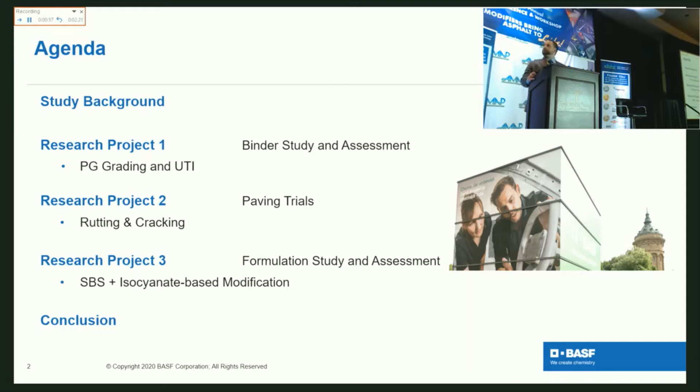Well, that didn't show up. There should be a map on there.

What I wanted to introduce here to everybody is, as most of you know, BASF is huge. It's about 140,000 employees worldwide. What most of us here are used to is the people out of Charlotte. Those guys deal with your latex that you put in your emulsions.

The group that is actually leading this project and this initiative is out of Wyandotte, Michigan. And with that move that I commented on earlier, I actually moved out and we built an asphalt lab and are starting to do research in that area as well out of that facility. So they're all over the U.S. You can see that we have the different states and everything listed, even though the picture didn't show up there.

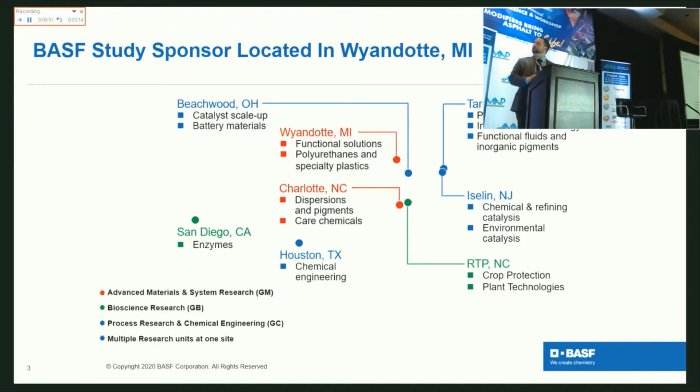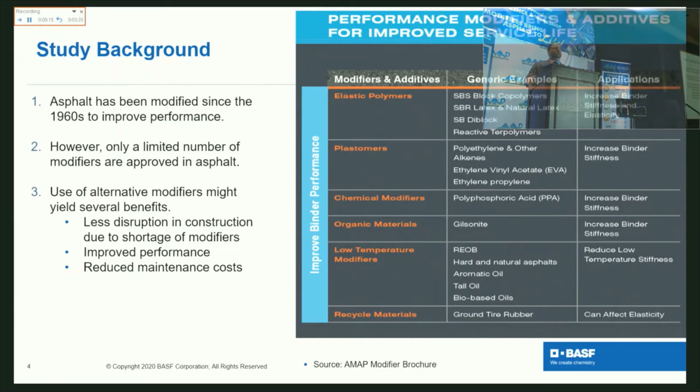So with that background, what we did is we were trying to take this isocyanate, which is essentially a precursor to a polyurethane type chemistry. It's used as a building block for all kinds of stuff that you would typically use in your day-to-day life. We tried to fit that into the paradigm that we have in the asphalt industry of what type of modifier it is. So this material, it's a reactive modifier.

It is a chemical modifier. This list is the one that AMAP has that they have out on their website, that's available for everyone. What we found is that when you use an isocyanate-based chemistry, it doesn't really fit very well into this. While it is a chemical modifier, it doesn't just increase the binder stiffness. It adds a whole lot of other functionality.

So it doesn't really fit there as well. So we can call it a chemical modifier because essentially that is what it is. However, it adds a whole lot of other things to it. One of the things this does, and I'll show you later in one of the slides, is it has a lot of potential in the interaction area with the different SBSs. You could kind of use it interchangeably with a lot of stuff to achieve the same type of modification.

It's a liquid modifier, so you can simply inject it into your tank. It's low shear. You can mix and stir, essentially. In some of the trials, we actually were able to inject into a tank at the mix plant rather than modifying at a terminal, just for ease of use to prove out the operational feasibility of using this material.

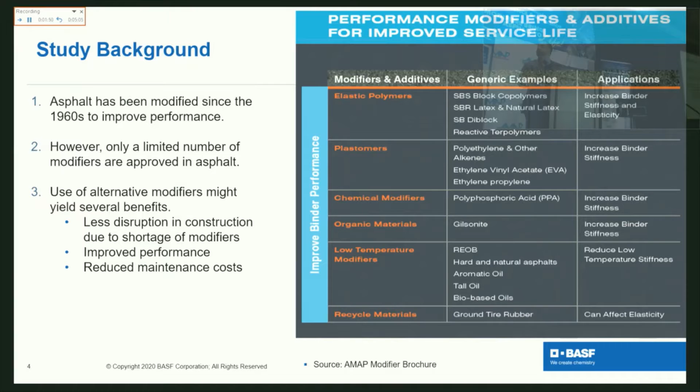So from there, I wanted to talk about what type of modifiers we know and then what is an isocyanate. We are working with some types of reactive polymers, terpolymers, copolymers. Some epoxies are reactive. We know PPA is reactive. In the asphalt industry, though, we typically say we blend it. It's blended and it's put in, and you have a blend rather than a reactive chemistry.

What we found with this material is that you have to allow that time to react to achieve the full amount of properties that you want to achieve with it. So, again, like I said earlier, we were looking at how can we improve the binder properties. And then, is it equivalent or better or the same as our normal modifiers that we use?

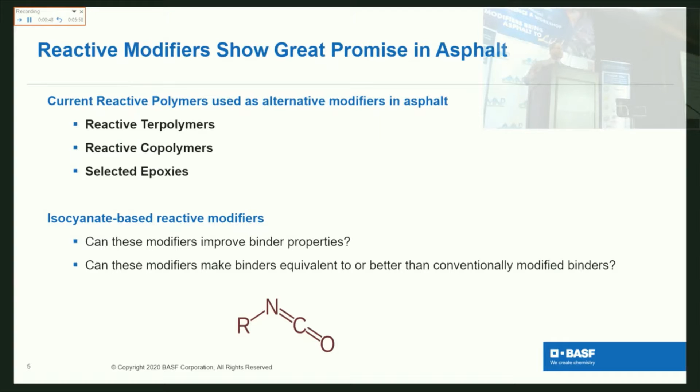So within the industry, can I see a show of hands? Who's sitting on a cushion right now? I'm not seeing very many hands, and I'm a little bit worried about it, because if you're not sitting on a cushion, you're sitting on something different than everyone else, okay?

The cushion that you're sitting on is likely made from this chemistry, okay? Day to day, you're using this material. When you get into a brand new car, that new car smell is related to this type of chemistry. Isocyanates are used for that type of stuff, okay?

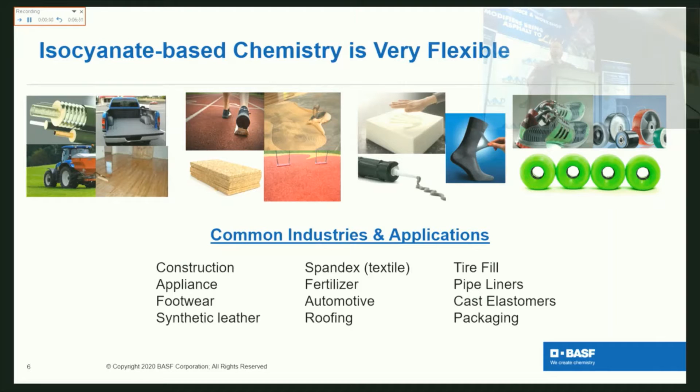Again, you can see just from this list the amount of things that you're using every day. It's extremely flexible, meaning you could use it for a lot of different things. So the functionality of the different types of polyurethanes really just covers a lot of areas, from impact resistance all the way down to wear.

You can see with the different types of additives that we're currently using in the asphalt industry, such as rubbers, plastics - of course, we're not really using metals. However, we can expand and utilize that functionality with a polyurethane type additive, or in this case, a precursor to the isocyanate-based chemistry. Okay.

One thing I want to show here, we have that resilience up there. And it's kind of a paradigm shift from what we're used to, right? We're used to looking at SBS as an elastic type material, but when we react in isocyanate, we can create anything from as hard as you saw previously to roller skate wheels, or as soft as a super ball. Of course, this isn't the best place to bounce a ball - I could throw it at you guys and bounce it off somebody's head - but you can be stiff and flexible at the same time with the isocyanate chemistry.

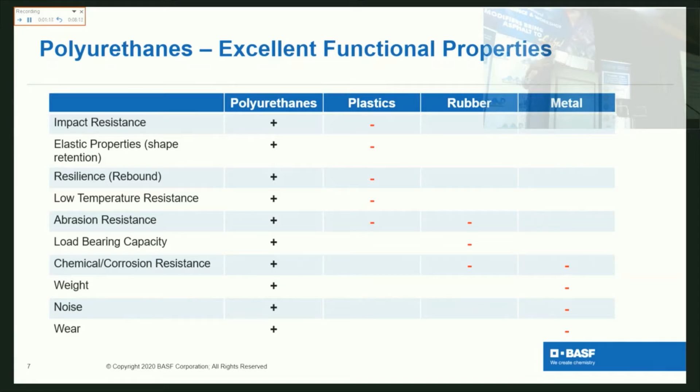So again, with that paradigm shift, what are we normally looking at? We're normally looking at elastomers and plastomers. Isocyanate is an adhesive. If we go back to that slide that showed the different day-to-day uses, there's things like OSB board - it's used as a glue. Products like Gorilla Glue contain an isocyanate-based type chemistry.

It's actually a liquid, as I stated earlier. One of the interesting things that we have found, and I'll show on slides coming up, is that the viscosity of the material once modified does not increase very much. But this also is a liquid storable at room temperature. It can be pumped straight into a tank.

It's a reactive chemistry as opposed to a blend. So the fun part of a reactive chemistry is it then becomes part of that chemical compound or the asphalt binder, and it does not separate. We've run up to 60 days of separation testing, held it in an oven to check it, and we had 0% separation. And again, it is a thermoset, and we are typically using thermoplastics.

So in the industry, when I first heard thermoset, that kind of scared me. I didn't want to put it in asphalt. And again, what we have found is that we can use our typical methods of testing and find that you can just test it normally and get that improvement that we're looking for.

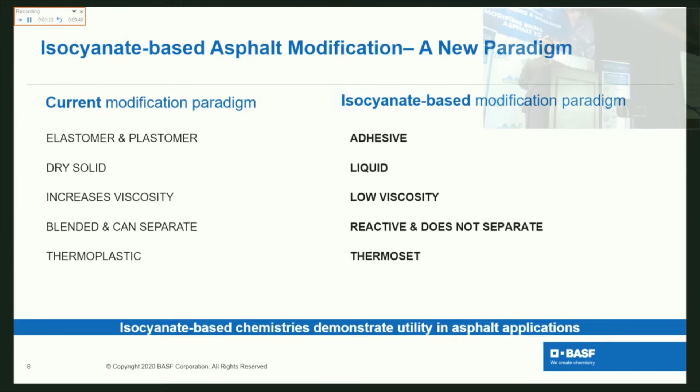So, what does it do? When you add this material, an isocyanate-based chemistry, to an asphalt, you are essentially bonding to an OH group within that asphalt on the asphaltene. And rather than building a structure that you normally see there with the physical mixing, where you have the asphaltenes and everything floating around and you kind of create a mix, we're actually bonding and stiffening the material through a chemical reaction, bonding those asphaltenes together.

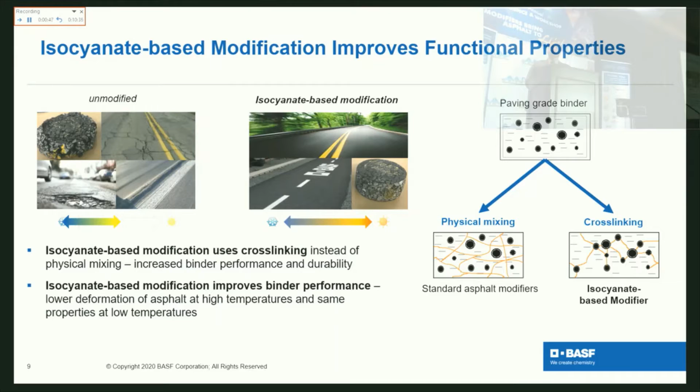So, of course, with that reaction, with that stiffening, we get some extreme rut resistance numbers, as well as a very low impact to your low temperature grading.

And then we took that and said, okay, well, what kind of reaction was that? Because we didn't know at the time. We sent it up to WRI and requested some research be done, and said, these are the SBS, 3% SBS modified materials. Let's run some UV fluorescent microscopy and see what they look like. And then we took a 3% isocyanate-based modification and requested the same.

And as you can see, this really just proves out my previous slide in saying that once it's chemically reacted, you can't see it anymore. It is gone within the structure of the asphalt. We have taken and run some FTIR studies and noted that you can react the material so it's no longer detectable on an FTIR.

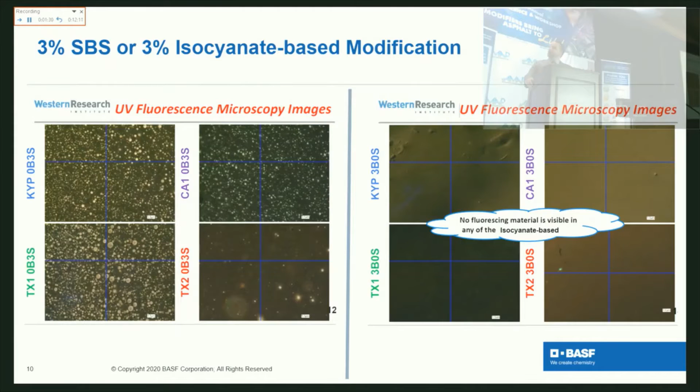So, to the research that was presented last year at Peterson, we again submitted the material down to TTI, went down and conducted some training, asked them to blend this material and then run it through basic performance tests for performance grade and UTI expansion, so we could get a third party lab to verify the findings that BASF had found.

The other task that was set to them was to determine the optimum dosage of isocyanate-based modifiers. Essentially we wanted to yield similar properties to SBS as much as could be done.

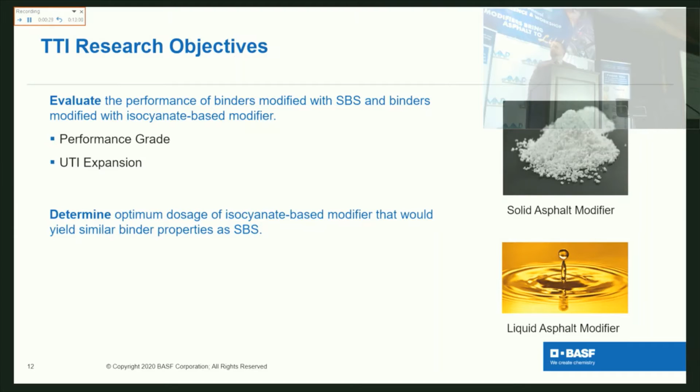So they took, again, 5 different asphalts, some from the Midwest, some from down south, some from out west. We had a 0% control, then a 3% SBS, 3% isocyanate, and they basically ran it through the normal slew of performance grade testing.

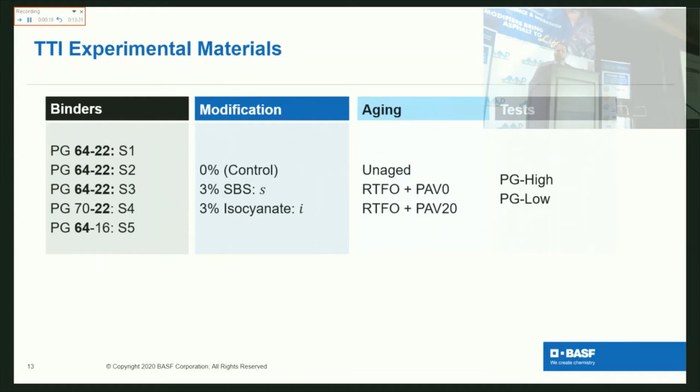As you can see on this slide here, it is a reaction-based chemistry. You can get an extreme improvement with the right type of asphalt. We were essentially able to take that 70 minus 22 all the way up to a 93, which would be a 94.

In this case, we found that a lower percent isocyanate-based modification, I don't know if you guys can see the light blue colors there, that's the SBS modification, and get an increase at least equivalent or better than just using a straight SBS modification.

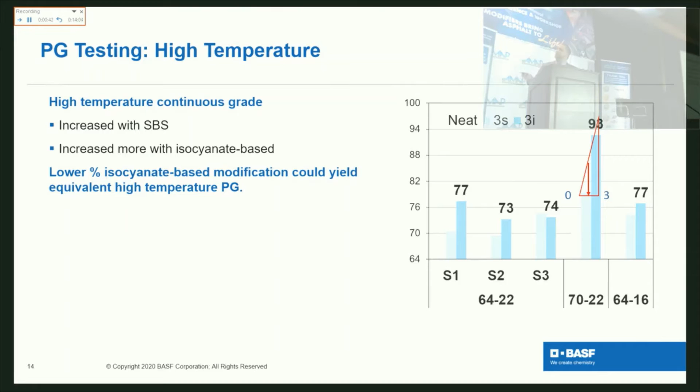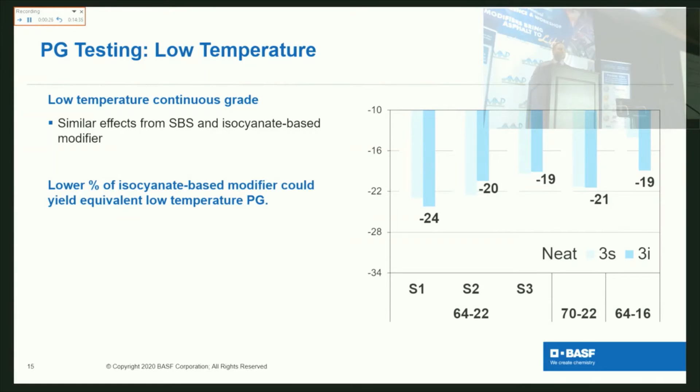We also looked at the low end, what happened with the different SBS and isocyanate. Again, we found that a lower dosage of an isocyanate-based modifier could yield equivalent results to a low temperature as an SBS type modification. It's very similar in effect when it comes to stiffening the material or moving your PG grade, with the exception of being reactive. So some asphalts will react much more.

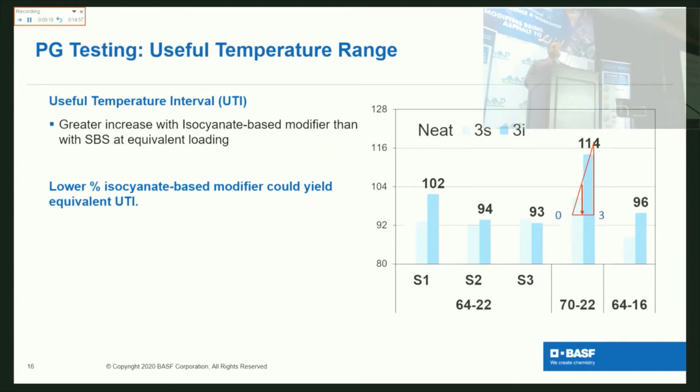So again, with that, what we found was that UTI expansion on some asphalts was up to 114 degrees with just isocyanate modification. Comparing the two, and again this was just comparing everyday usage, SBS to isocyanate, we found that with both, it could increase it equivalent to, or at least the same as, SBS.

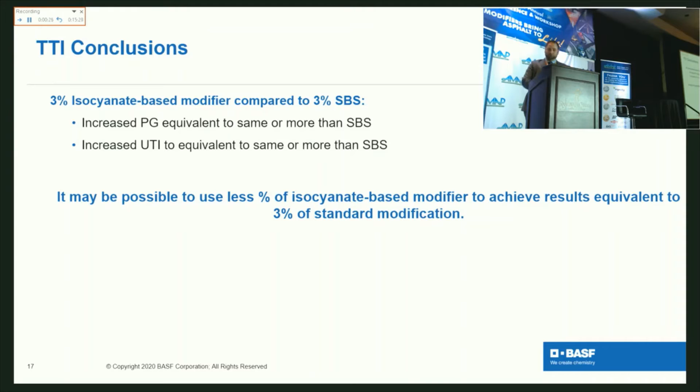So from there, once we found that we could, in a lab, modify asphalt and increase the UTI, increase the upper end, we said, well, let's go pave with it. So we went out in the Midwest. We did 2 separate paving trials. We paved 5 different roads. Over 7 miles of paving was done. Again, this was to establish operational feasibility.

We also went out and hired a third-party testing lab. I'd like to thank Phil Blankenship and his lab for the work that they did. They were out there on the road, right off the paver, pulling, shoot, I don't remember how many boxes every few miles, probably upwards of, Phil's truck was full in the back, twice, he just told me from the back there.

Some of the things that we found were essentially just anecdotal findings. You can see here with the modified asphalt, there was no sticking to the truck. They used a release agent once in the morning, and never had to respray the back of that truck with any release agent. It was noted that it compacted easier than their regular mix. We did have a control, and then our material, and then a control. So we basically capped the end of each road with the control, and then in the middle had the isocyanate-based material.

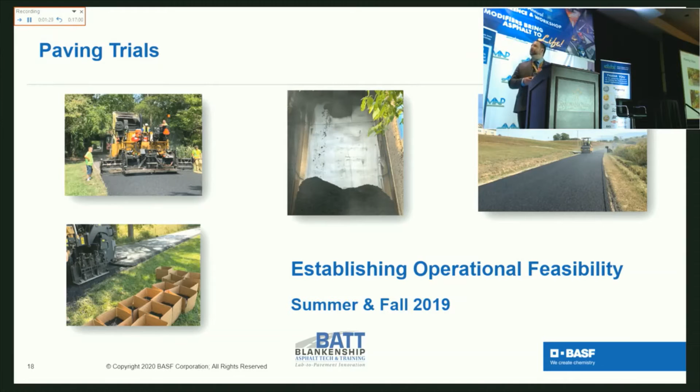So again, part of our study was to prove out how it can be used from beginning to end. Our initial goal was to modify within a large asphalt terminal, which is still the goal. We are modifying the asphalt. But since it's a new material, most people, of course, don't want to put it in their tanks. I don't blame them. I wouldn't if you asked me either.

So what we did find is there were some companies willing to let us modify in the mix plant within some of their tanks there. So in each case, we modified 150 tons of liquid and allowed it to react, and then created the mix and paved with it. Again, we wanted to check how it worked while paving.

One of the other things we noted was that it seemed to not stick well to the bottom of a roller without the water on. We actually had to tell the guy to turn his water on to ensure we didn't have any issues. So we've essentially proved out that we can modify in a terminal, even though we did it in the mix plant, because we were still doing it in the liquid tank at the mix plant.

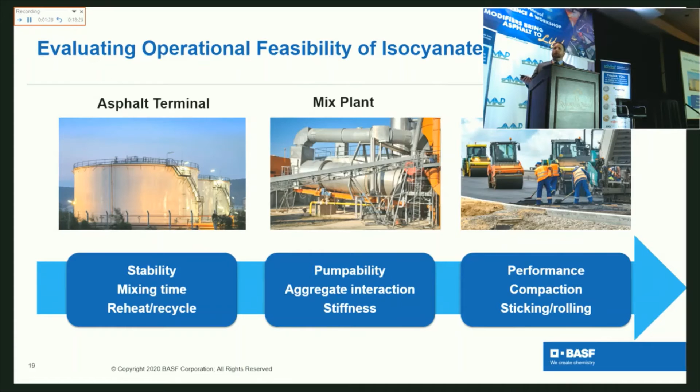So again, it's been paved all over the globe, from Germany to here in the U.S.

So we paved in the first Midwest trial back in September, and then in October we paved another road in the Midwest, and this one was a neighborhood road rather than the rural roads we did at the first trial. Both of those were 1.5-inch lifts. Actually, the total on the rural roads in the first Midwest trial was 1.5-inch lift, and the total was 4-inch on the Midwest trial with a 1.5-inch cap.

And again, on the road in the Midwest, it was not a very long trial. On the second one, it was only half a mile long. Again, we pulled samples off of that, and again submitted them back to Phil Blankenship for testing. I'll have some of those test results that he got off the first trial here shortly.

And again, some of the anecdotal feedback we've received is similar to what CJ was just saying - a lower odor, and in this case it was actually a lower sulfur odor coming off the asphalt. In both trials, I was there - that really pretty face right up there on the back of that paver would be me. The comments made to us from both companies was, hey, it smells less.

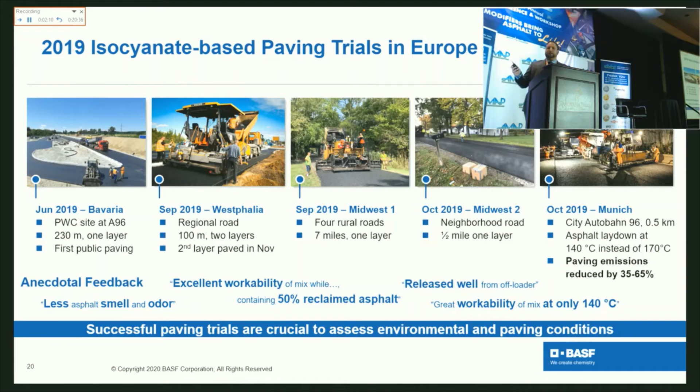That being said, first thing I want to point out is just a little plug for Phil back there. If you look here right on this Hamburg wheel tracker, that's the Batman symbol. I don't know if you guys have talked to him, but it's Bat Lab, and he's the Batman. I'm not so sure about that.

So what we did on this one, it had 12% RAP, 4% RAS in the mix. The control was a 3.4 on the Hamburg wheel tracker.

Our blend was a 3.9 on the deformation, on the rutting. Statistically, that's essentially the same. This mix is the one they used for the DOT grade mix. There was essentially no improving this mix.

What we need to do moving forward is find a terrible mix, and try adding this blend asphalt to it to see what happens, see if we can actually get some improvement. All laboratory tests indicate we should see something better.

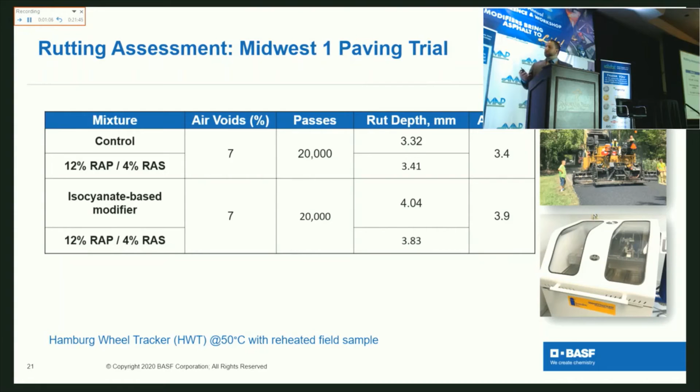The other finding we had from this trial was with Ideal CT. Phil tested that, and we were able to see improvement just with this additive. The additive loading on this trial was only 1%. The customer was looking to take their 58-28 and improve it to a 64-28 and pave with it, so we did it at a 1% loading level.

Then we wanted to see what kind of cracking resistance we would get. The only difference between these two is just that 1% isocyanate-based modifier, and you can see the average CT index went up significantly, just based off of those two things.

The other interesting thing is that when modifying with this, typically with most modifiers you bring your low end number up along with your upper end. With the right asphalt, because it's reactive, you can expand differently. You saw on that other one, the 114 UTI, it does not bump your low end up as much as it would normally with regular modifiers.

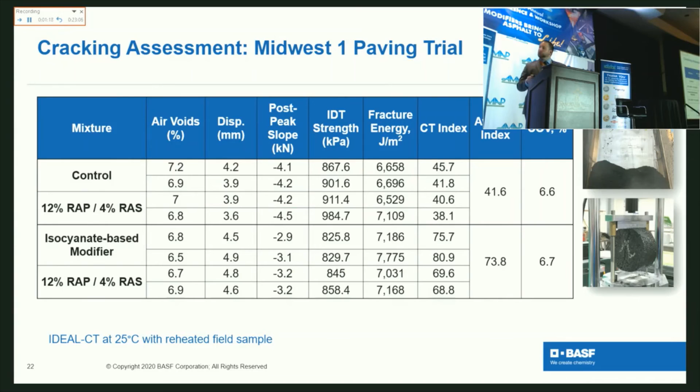So the summary from those findings - I've already spoken to the first two or three bullet points. Essentially what we proved, similar to what CJ said - I really enjoyed his presentation because he took some of my thunder - he said it was normal paving, there was no difference. We paved with it, we rolled it, and it worked great.

And in my mind, that's a win. If you could go out and add a new modifier and just normally pave with it without any changes to your laboratory or paving crew or any of the stuff you're doing, you've proven that you can do it, right?

Again, there's little viscosity change when the binder is modified. There's no sticking with this material until it cools down. One interesting thing - Phil and I were walking along the mat. As it cooled down, you could walk on it normally, and then as it cooled further, it started to get more tacky, so your foot would stick excessively compared to what's normal.

So again, like I was saying earlier, it's an adhesive - it's a glue. Not just an elastomeric adhesive or elastomeric glue, it's a hard glue. Once it cooled off, it was essentially like a rock.

At one point during the second Midwest trial, we'd finished with the paver, done one roll with the roller, and somebody backed out of their driveway. Of course, the entire paving crew froze - they're freaking out, thinking they're going to have to go back and fix it. As soon as they turned the wheel, everybody ran over to look, and there wasn't a mark on the pavement. It was very impressive. That material had a 2.75% loading of the isocyanate-based material.

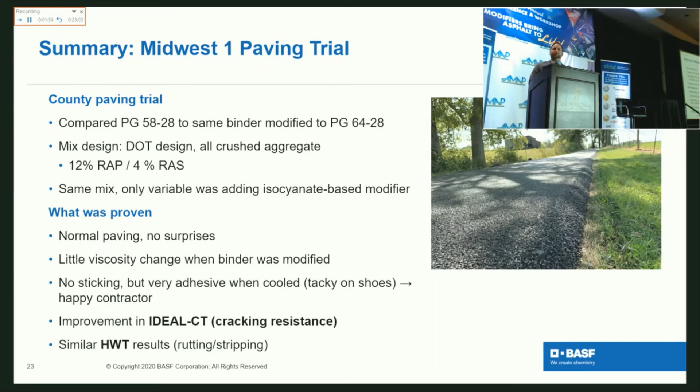So from there, internally we took it and wanted to look again at the interactions with SBS. What happens when we use it in conjunction, because with isocyanate-based material, you don't get the elastomeric properties that you do from SBS. You do get some, but not as much as we're looking for with a normal specification. Again, that's my point with the rubber ball - it's a different paradigm.

Last week I decided to ask, what's the extreme that I can take this to? I don't have the data to share today because I didn't get it done in time. However, I did make a PG 94 minus 34 with a viscosity that was under 3,000.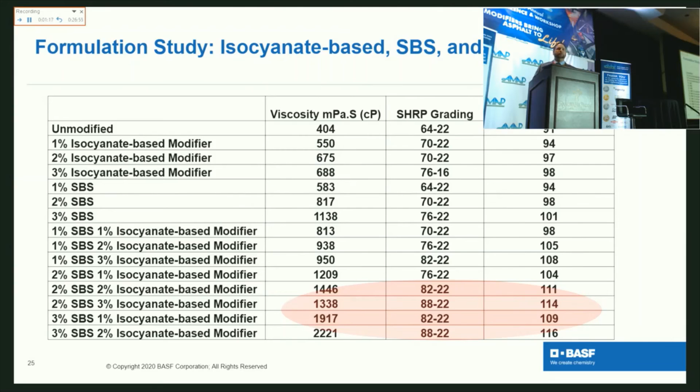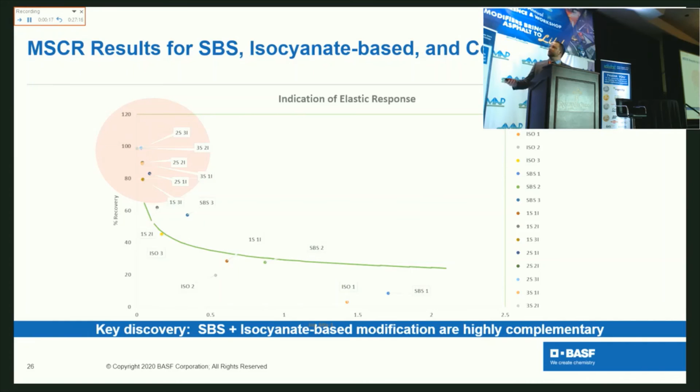From there, we also decided to run it against the MSCR. Essentially, when you run them in conjunction with each other, and you can't see the white at all, you can get down to essentially a 0 JNR and 100% recovery. They work really great together, is what we're looking at.

Based off of these findings and off of these trials, this is our findings essentially. What we want to do moving from here is move on to other trials, do some more paving, try some different formulations, look at some different specifications, and see what else we can meet. Overall, it was extremely successful. We were able to essentially pave exactly like you would normally pave, but have some extreme binder modifications.

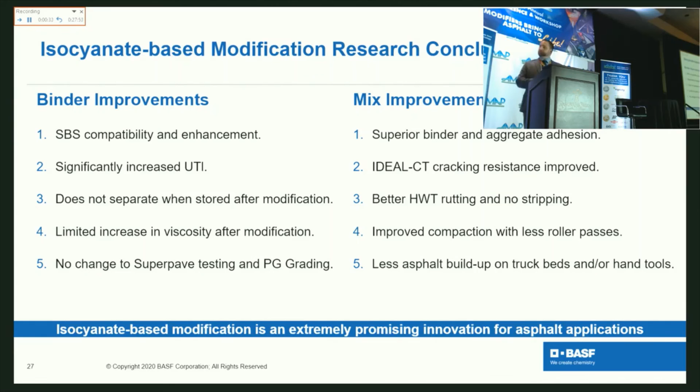I'd like to thank those that were helping us out: WRI, JP Planche, Michael Elwardany, who did a lot of work for us as well, Texas A&M and the TTI—their group and the research they've done has been extremely beneficial. And then Blankenship Asphalt Tech and Training for all of his work that he's done with us as well.

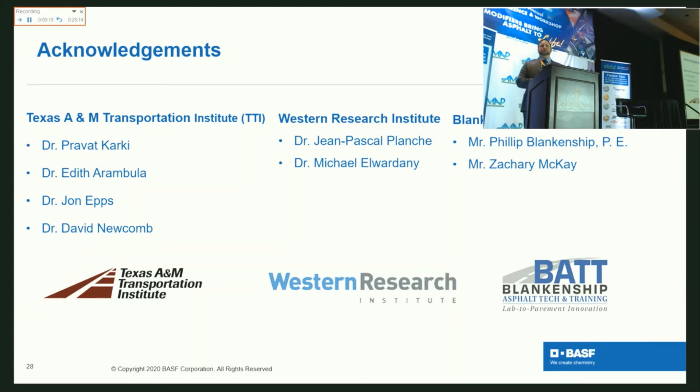Any questions? Anybody have any questions? I see, oh look, over here. I'm coming. It's hard to see. Now I can't see you. Right there?

I was wondering if you had any elastic recovery numbers with just the isocyanate as an additive. I do. Again, like I said, you don't get much elastomeric properties. It's not an elastomer, it's more like my rubber ball here. If I throw this against the wall and record it on a slow motion camera, you can see it smash and completely recover, right? However, it's not like a rubber band—you cut it, you damage it, it doesn't come back, okay? So you can get probably, I've seen a 10 to 15% recovery with it by itself.

What about with the SBS? Does that affect the elastic recovery when combined? With the SBS, you can get extreme recovery. So it's just in conjunction—once you put them together, again, there's no reaction really that happens between SBS and the isocyanate-based chemistry. However, it's very complementary to each other. Thank you.

Brian, I'm wondering if you had any idea of what the reaction time is from the introduction of the isocyanate with the asphalt and complementing with the SBS. With asphalt and SBS at the same time, essentially, it depends on your loading. So a 1% modification can take an hour to 2 hours. Once you go up to 2%, it can take up to 6 hours. It just depends on that loading and, of course, your agitation.